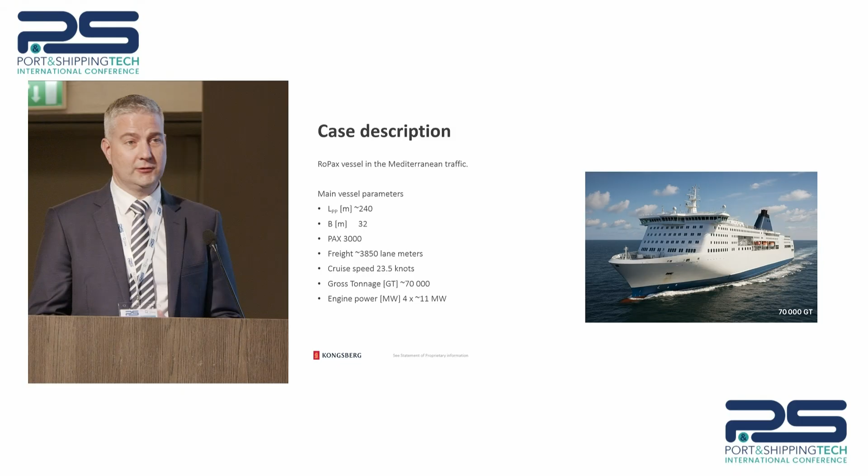So I took as an example a fictive 70,000 gross tonnage Ro-Pax ferry, quite typical to what we see operating today, designed for a cruise speed of around 23.5 knots, and we have about 3,000 passengers, close to 4,000 lane meters, so quite a typical ferry that we see today.

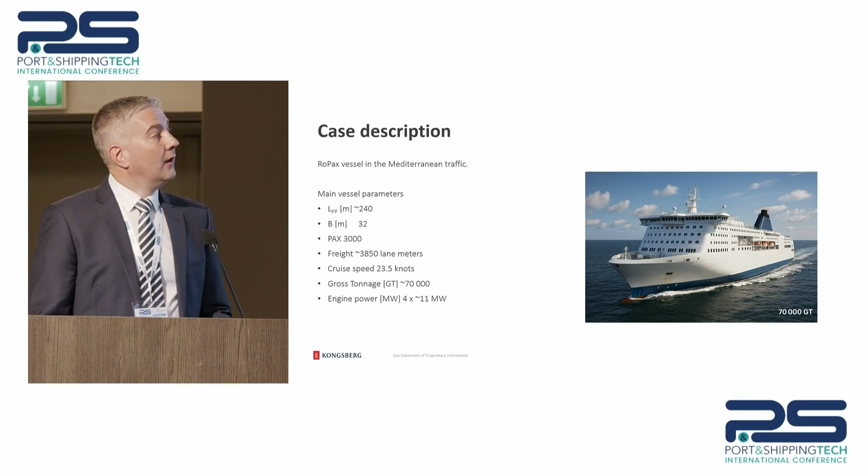So to look at different propulsion alternatives, the base case is basically two traditional shaft lines through a gearbox, twin equal sized engines driving the system. And as a comparison, a three propeller solution where we would have a single shaft line CPP, most likely with a fully feathering functionality, and the propeller driven through a gearbox with the similar engine configuration, just to keep it simple.

And then a father-son approach with the diesel, or not to specify a fuel, generators. Today we have a lot of different alternatives for fuels, but I think in this presentation it doesn't actually matter. What we want to do is look at the actual performance of the vessel in itself. And a last solution, a pod alternative.

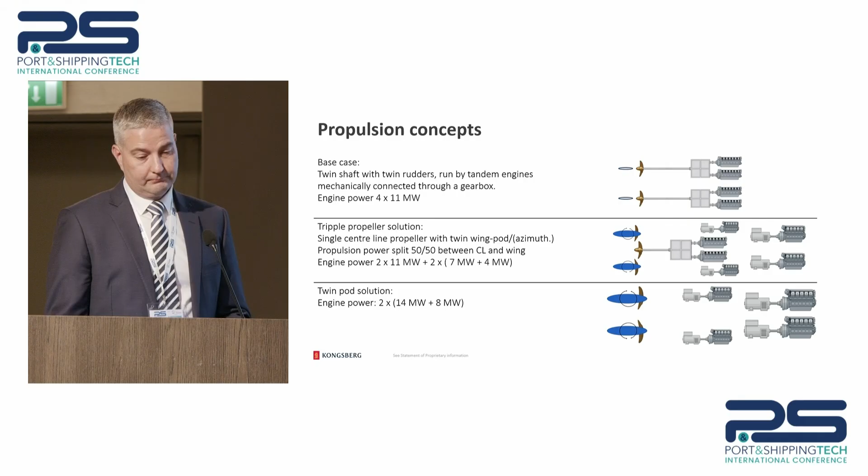So one of the starting points is how do the vessels actually differ? And this is a simplified input on where the differences come from a hydrodynamic point of view, trying to utilize what's been seen over the years in development and roughly generalizing the influences. So we have the base case, mechanical shaft lines. We assume roughly 4% mechanical losses in them. We have a hull and rotational efficiency of roughly 98%.

The triple pod case is divided into a more or less 50-50 share between the two propulsion systems, the wings and the center line. Hence, you get a bit of differences. In principle, the resistance for the shaft line is increased by roughly 2% compared to the reference case, and this is basically coming from a gondola in the center line to accommodate a center shaft line. The 2.5% stands for the added resistance at lower speeds when the propeller is standing still or feathering.

For the wing solution, we have a -6% estimation coming from removing the shaft lines and brackets from the standard base case, and hence improving the resistance performance in that respect. The wings are presumed to be electric, so we will have roughly 8% electrical losses in converting mechanical energy to electric. The hull efficiency and rotational efficiency end up at roughly 98% also, and then something on the propellers. The twin pod solution basically utilizes the same numbers as the wing side. So in short, those are the main differences.

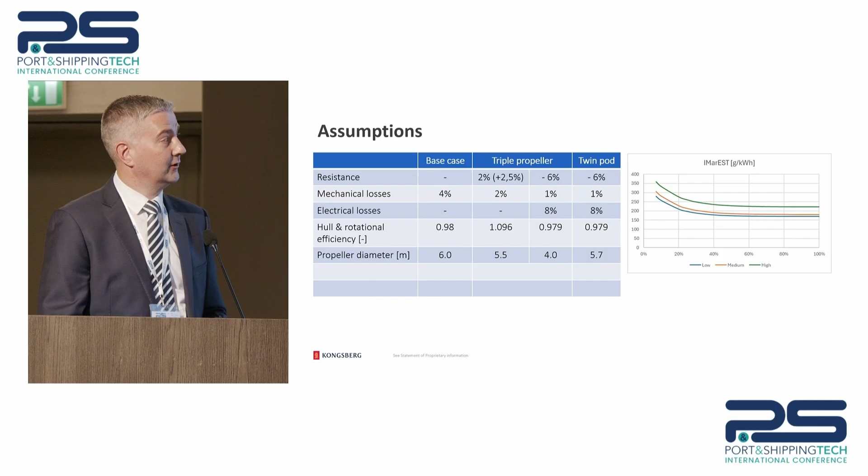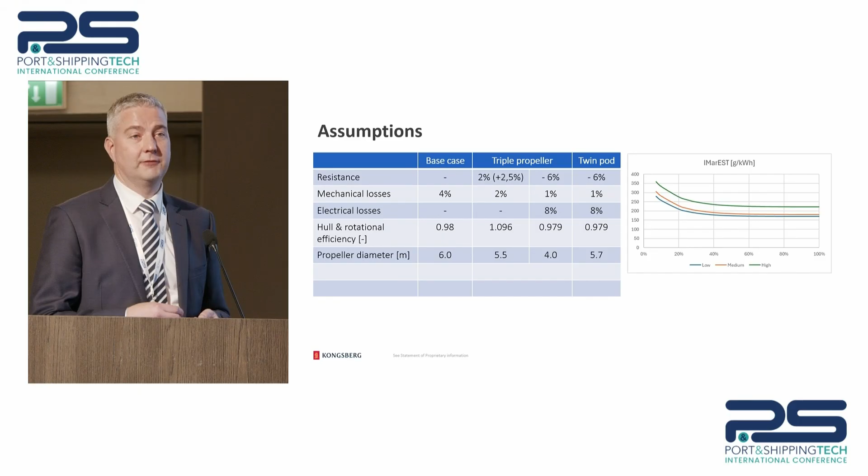Now, we're not engine manufacturers, so I'm not going to go into details on what engine does what. I found on the net IMarEST's really good curves on rough estimations of consumption of different engines. In this case, the assumption is that all the engines are medium speed. So it's a function of load, which basically defines their consumption.

So if I put this together and I look at the self-propulsion point of view, so first how much the propulsion actually requires power, we see that the curves line up quite nicely. The base case has a slightly higher consumption than the two other solutions. It's small, but it's a way to try to get into the picture.

But on the other hand, if I lay in also the effect of the engines based on that IMarEST curve, we actually start to see that there is a bit of gap in the curves. And primarily, the key point here comes from the fact that with a choice of having basically a diesel electric, we have a choice of how many engines are running, more flexibility compared to directly connected mechanical solutions. Yes, you have clutches which allow for something, but different size engines allow you to have a broader perspective where you get a better efficiency.

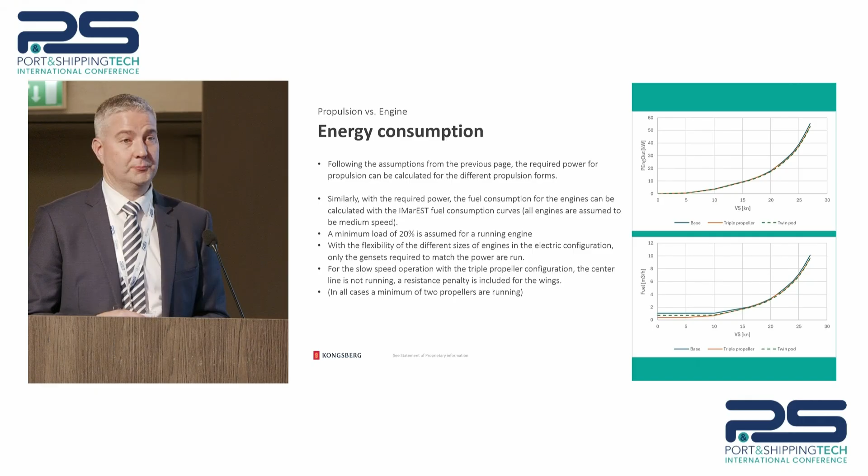So mainly where you see the implication is actually on the lower speeds, which quite naturally comes into play.

So briefly looking at a layout. Now the background picture is just a RoPax I found on the net, so don't pay attention to where the engines are located. It's more a question of the stern accommodation of the pods or azimuthing thrusters in this case. And hence we run into a problem with the pod solution. This is one of the biggest challenges with the RoRo market, that there's a limitation on your keel height, so there's a limitation on how much space you actually have in the stern.

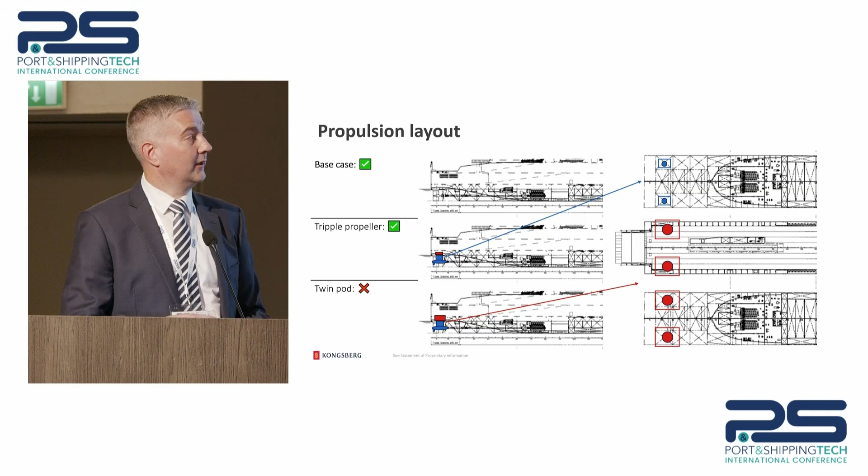And currently what you see on the pod market, if we're talking about propulsion power up to around 20 megawatts per unit, the size of the installation starts to be so big that it's poking in through your cargo deck. So either reconfigure your layout, or the pod manufacturers need to solve that issue. But that's a challenge at the moment.

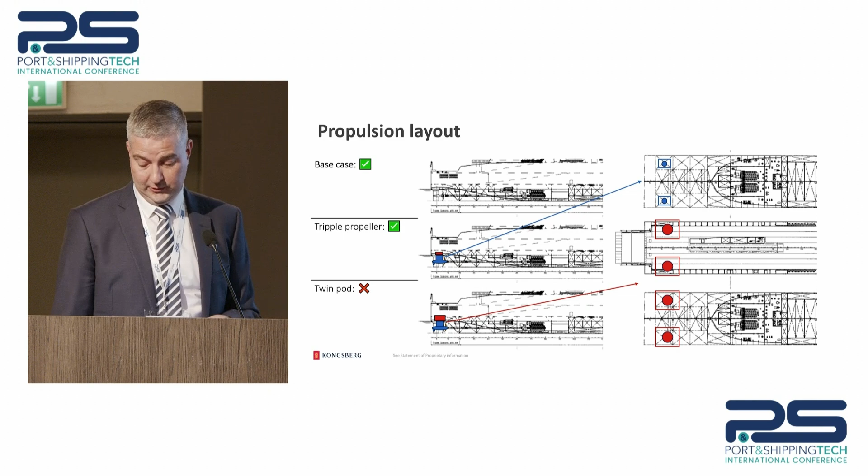So putting this all together, now taking a fictive route of roughly 170 nautical miles, we want to do one back and forth route in 24 hours, which ends up with a passage time of around 9 hours. In the Mediterranean, you quickly come into deep sea, you don't have that far approaches. Okay, so we don't have that much benefit of slow speed per se.

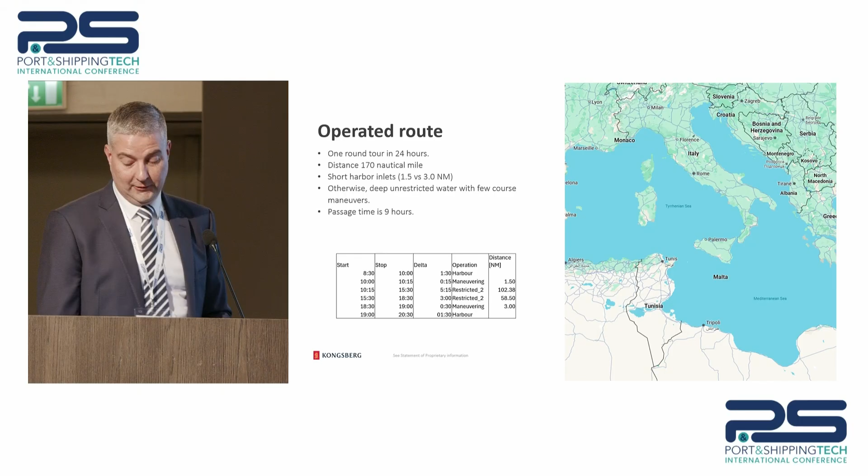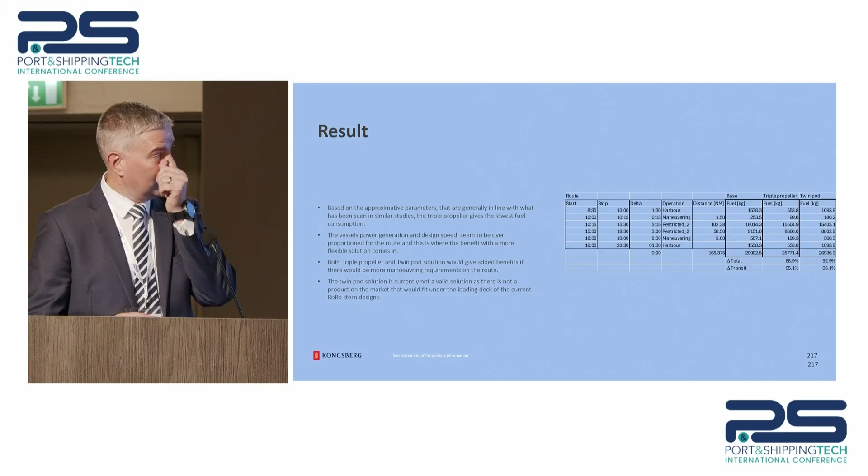Now, why this is an example of the reality is that if we look at the time, we realize that with this curve, our transit speed is 19.5 knots, so 4 knots lower than the 23 knots the vessel was designed on. Hence, we come into a situation where the vessel is highly overpowered, and we end up running at really low powers on the main engines.

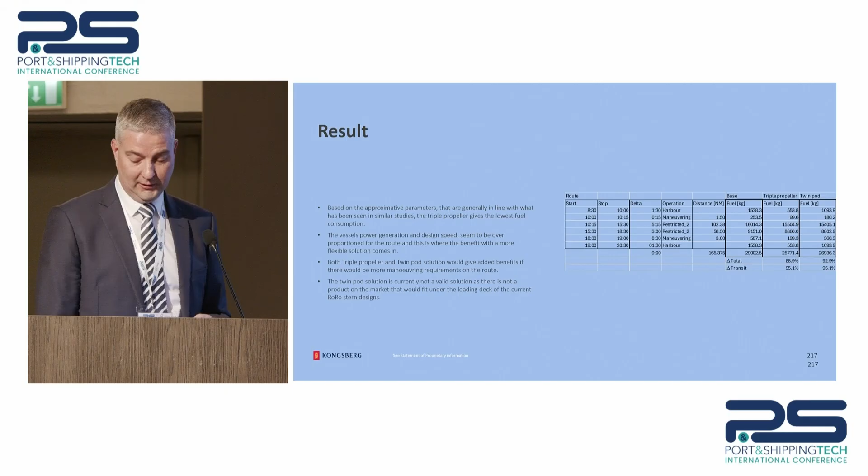Coming back to that curve, we see that we're over-dimensioning the system from the start. And hence, the two other solutions where you have more flexibility bring in that benefit by being a more flexible solution. Just to highlight that it's not a completely new idea to look at different solutions.

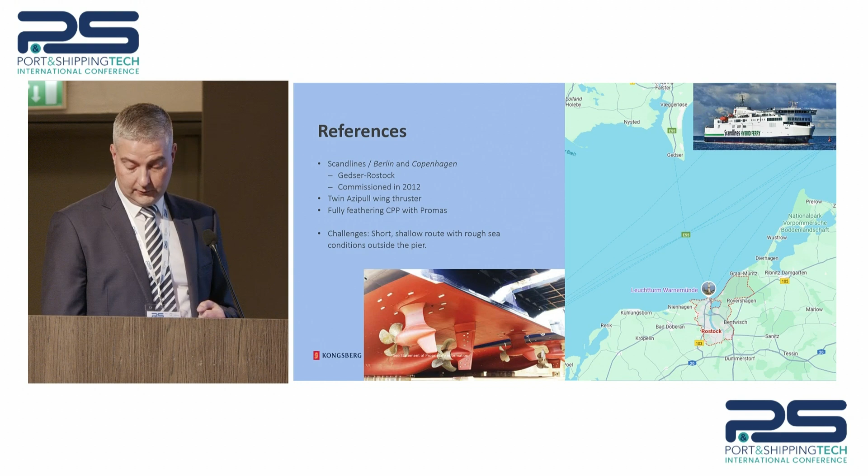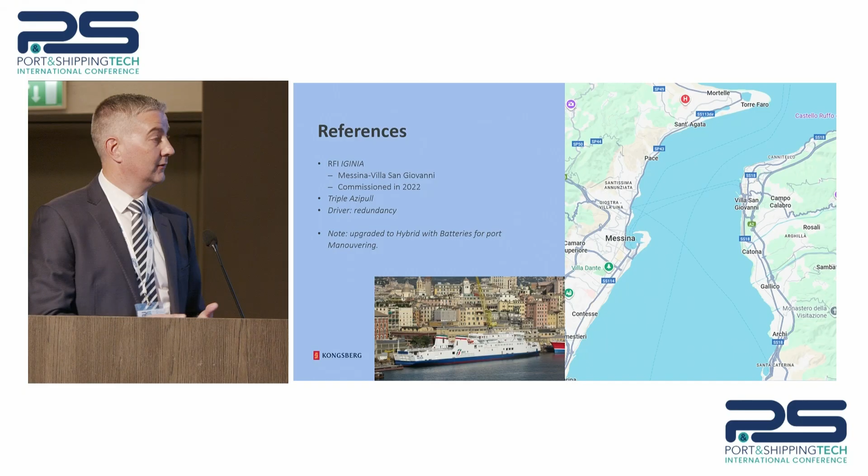This is one of the earliest developments and deliveries that we've had, back from 2012, where the challenge was basically a short sea route, so quite limited on time, and rough conditions that you need to handle with care. Another slightly newer one is down in the Messina Strait, where again, one of the drivers has been redundancy in the system.